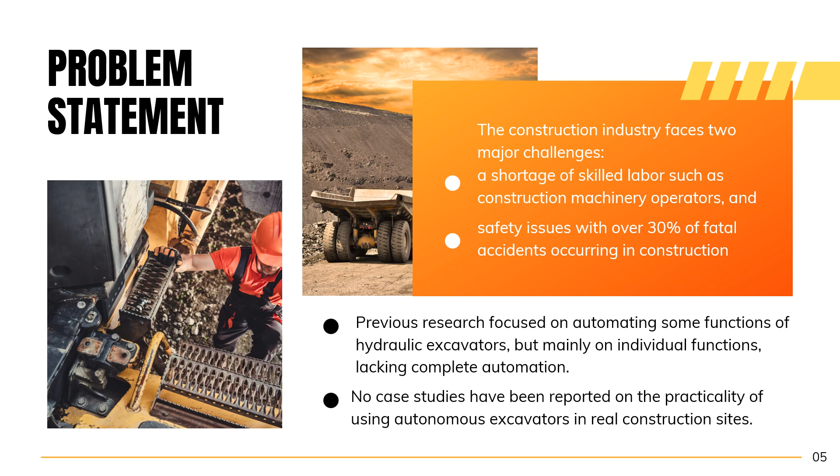In 2002, researchers worked on making a hydraulic excavator operate automatically using sensors and complex controls to guide its movements and route. In the late 2000s, studies were conducted on the forces affecting excavator buckets and using LiDAR and cameras to recognize the ground. This was done to understand operators' techniques in moving buckets, aiming to develop autonomous excavating machines.

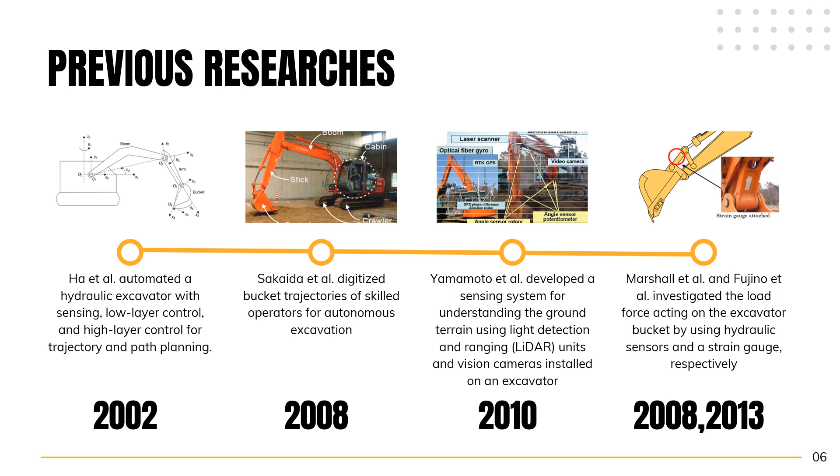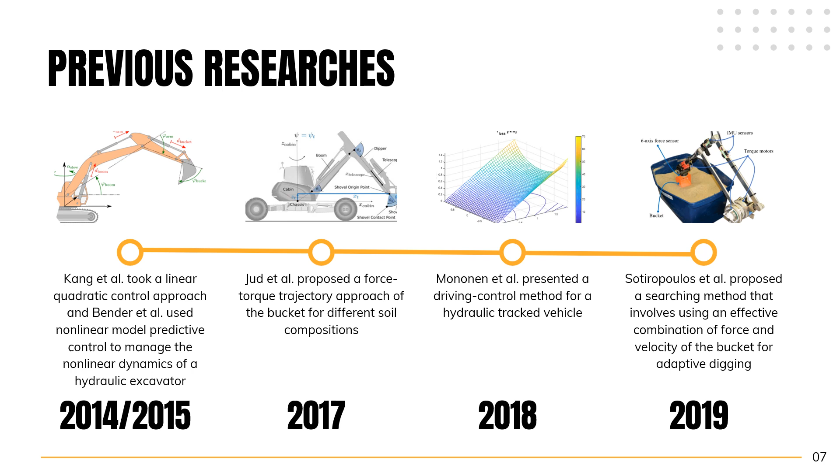Moving into the 2010s, research has focused on automated functions like trajectory and path planning. More recent work in the late 2010s proposed techniques like adaptive digging using force and velocity. Other research explored various driving control techniques and analyzed force-torque trajectories across diverse soil types. Numerous research efforts have adopted control theory techniques like linear quadratic control to proficiently manage complex nonlinear dynamic systems. This overview of past research laid the groundwork, but full automation and practical testing was still lacking.

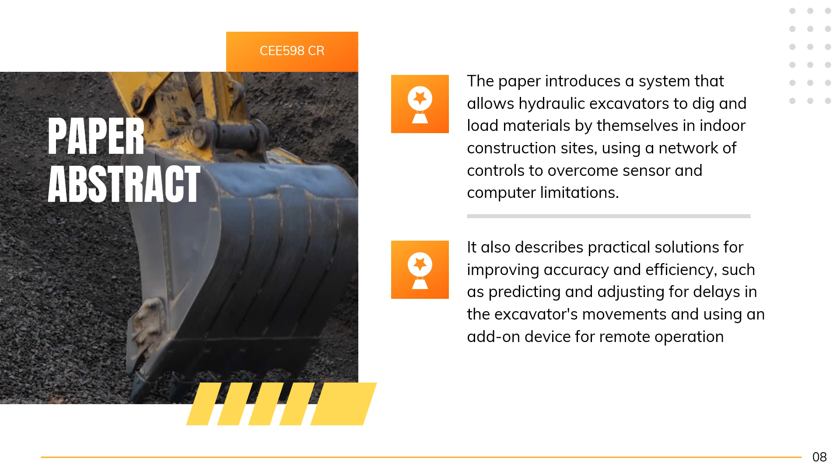This paper introduces an autonomous system developed to fully automate excavation and loading tasks performed by hydraulic excavators in indoor construction sites. The system uses a network of controls and sensors to guide the excavator's movements and overcome limitations in computer vision and hydraulics. Practical solutions are proposed, like delay compensation and an external actuator, showing how challenges of autonomous heavy equipment can be addressed. The researchers tested this system at an actual shield tunneling site to validate that full automation of excavation and loading is practically feasible with the right controls architecture.

The authors aimed to develop a self-managing system that could automatically handle all excavation and loading tasks on a construction site. This addresses the issue of incomplete automation in previous research. Another objective was to test the practical implementation of the system at an actual shield tunneling construction site. This objective is essential as it moves beyond lab simulations to real-world validation. Real-world testing will show if the system can automatically do tasks on a job site as planned.

The paper was chosen for its focus on creating an automated system for excavation and loading in construction using robotics. It highlights the significance of robots in construction, mentioning the development of autonomous machines equipped with sensors, controls, and machine learning capabilities. The authors emphasize the importance of testing robots on real construction sites to ensure their accuracy and efficiency, making their research significant for practical construction work with robots.

This slide provides an overview of the various methods used in the research. Slope sensors and linear encoders were installed on the excavator to measure its posture and rotations continuously. A depth camera installed within the arm captured the volumes of soil in the bucket. 2D and 3D LiDAR were used for tasks like localization, terrain mapping, and truck detection.

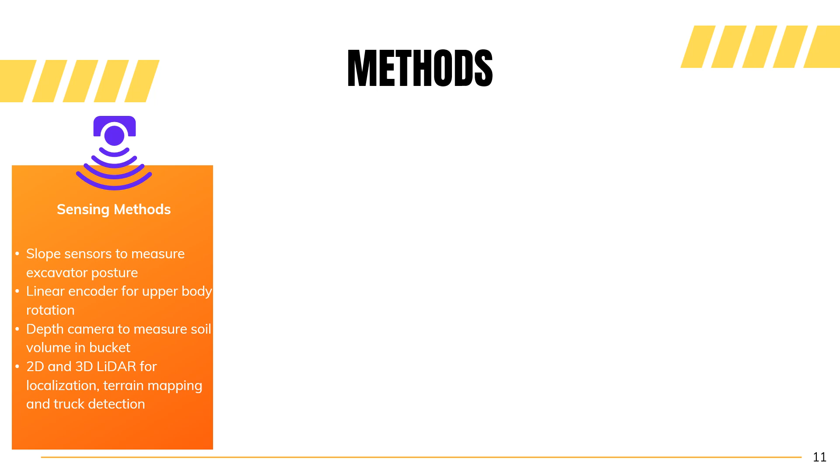Inverse kinematics calculates the required joint angles for desired positions. Proportional integral control manages angle and position effectively, while also compensating for hydraulic delays. State predictive control prevented overshooting. Initiating movement involves parabolic path planning, guided position control, and travel enabled by friction compensation.

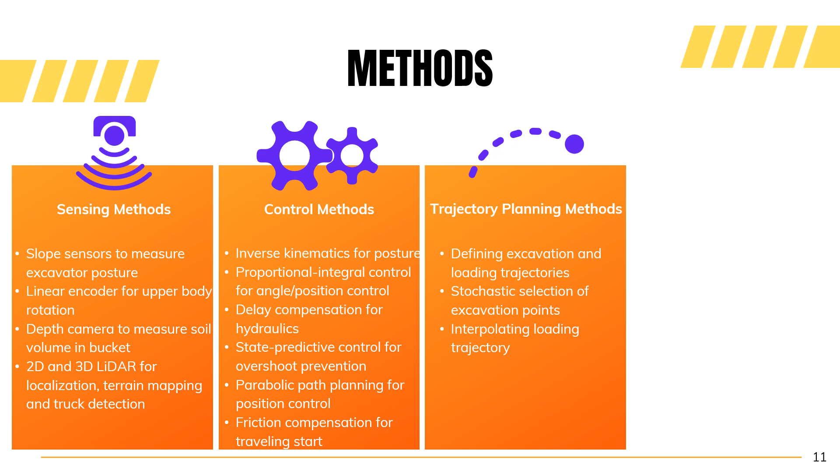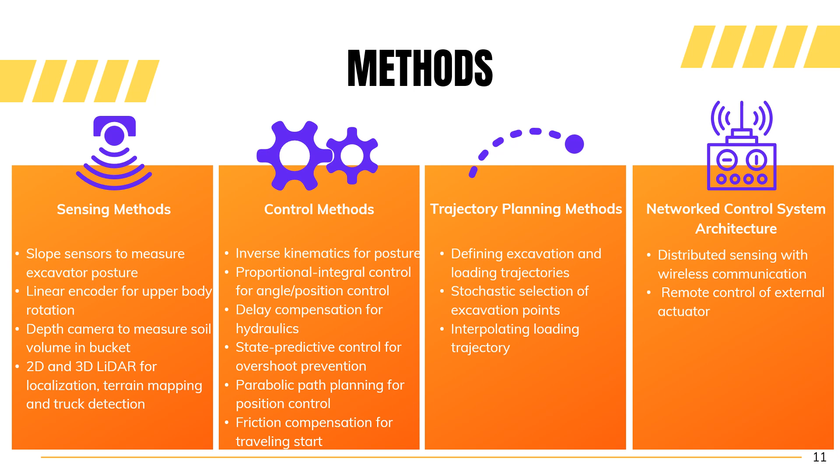Excavation and loading trajectories were defined through stochastic point selection and trajectory interpolation. A network of sensors gathers information wirelessly. An externally controlled actuator permitted operation from a remote location. This wide array of sensing, control, planning, and network system methods was vital to achieving the complete automation objectives.

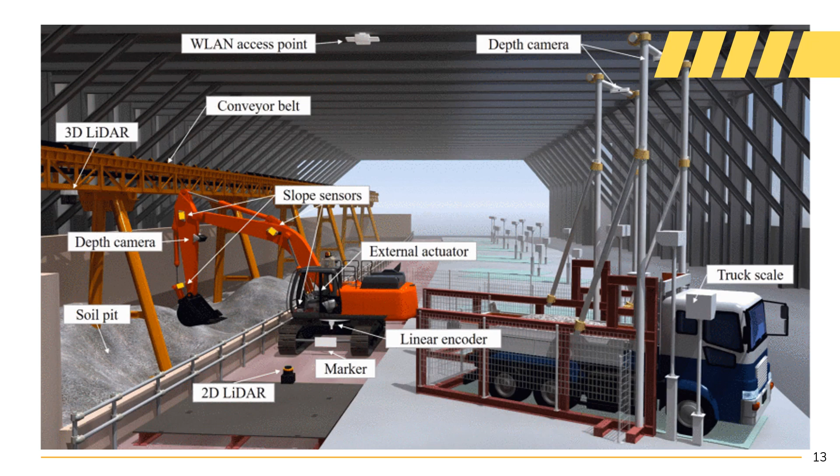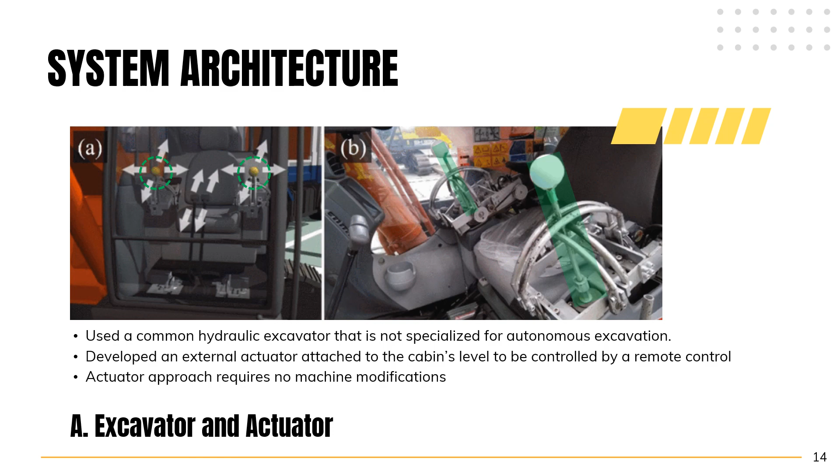This slide provides more details on the excavator and external actuator used in the system architecture. A standard hydraulic excavator already on site was used without any modifications, demonstrating the system's practical application. An actuator was installed in the cabin for remote control to safely operate the excavator without any changes to the machine.

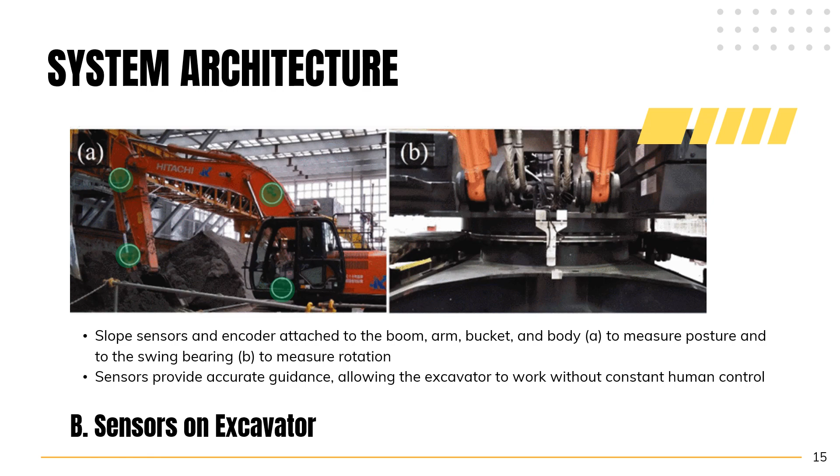Sensors and encoders were placed on important parts of the excavator, like the boom, arm, bucket, and body, to track their position during automated tasks. This distributed sensing approach allows for highly accurate guidance and control without constant human oversight. The external actuator and sensor installation methods were, therefore, practical solutions for autonomous automation.

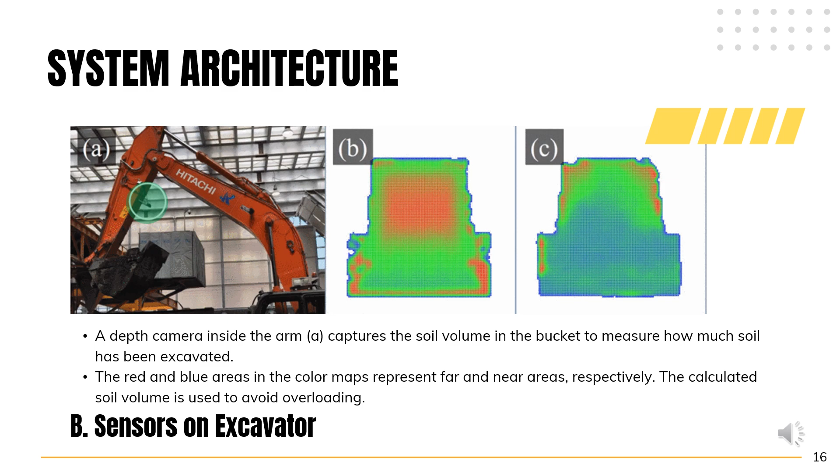A depth camera was installed within the arm to precisely measure soil volumes in the bucket, which is essential for tasks such as preventing overloading during the loading process. The camera captures RGB and depth images to differentiate between soil and empty space. The red and blue areas in the color maps represent far and near areas, respectively. The calculated soil volume is used to avoid overloading.

A 2D LiDAR was installed to measure the excavator's position by detecting the center and slope of a white marker placed between its crawlers. This enabled the heavy machinery to be positioned and moved accurately, making the excavation process more precise and efficient.

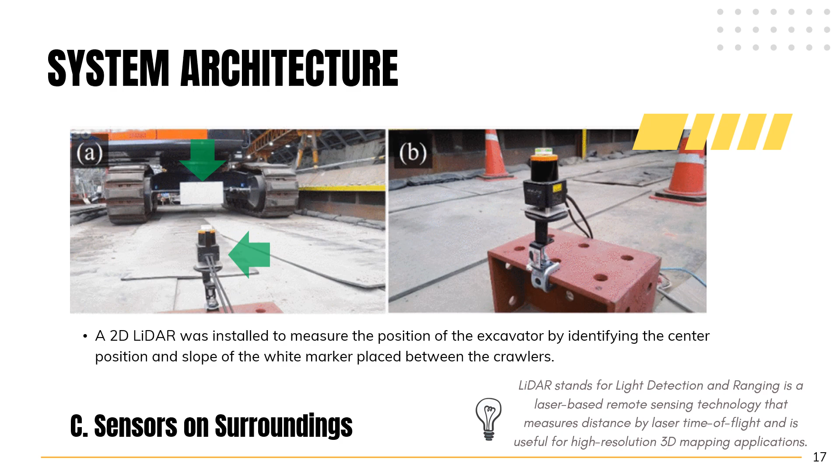A 3D LiDAR unit is placed beneath the conveyor belt to capture a full view of the soil terrain in the soil pit. This created a map of the area to help plan where to excavate. The detailed terrain map helps adjust the excavation equipment accurately, reducing harm to its surroundings.

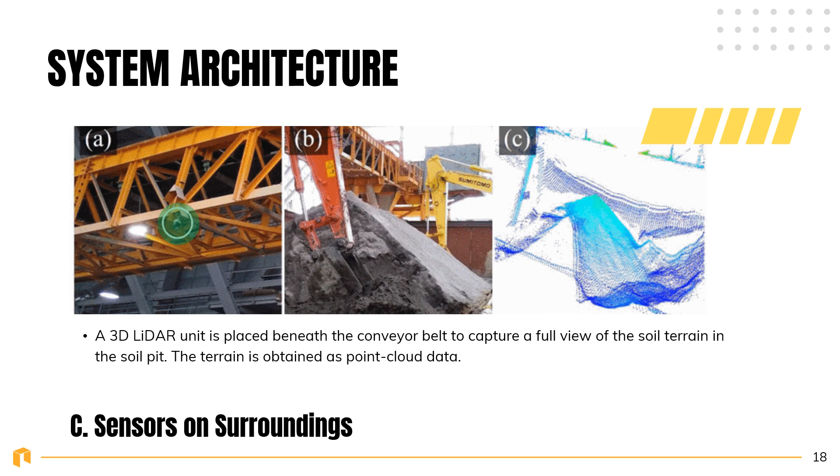A depth camera above the truck scale accurately measured truck parameters like position, size, and height through object detection. The sensors enabled the excavator to enhance its visual capabilities, allowing it to autonomously interact with soil piles and operate alongside dump trucks. The camera captures images in RGB and records depth information. In these images, red areas represent far areas and blue areas represent near areas.

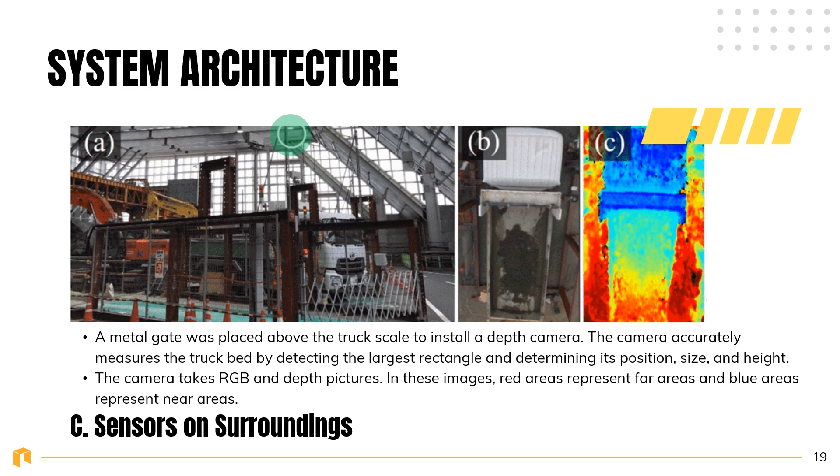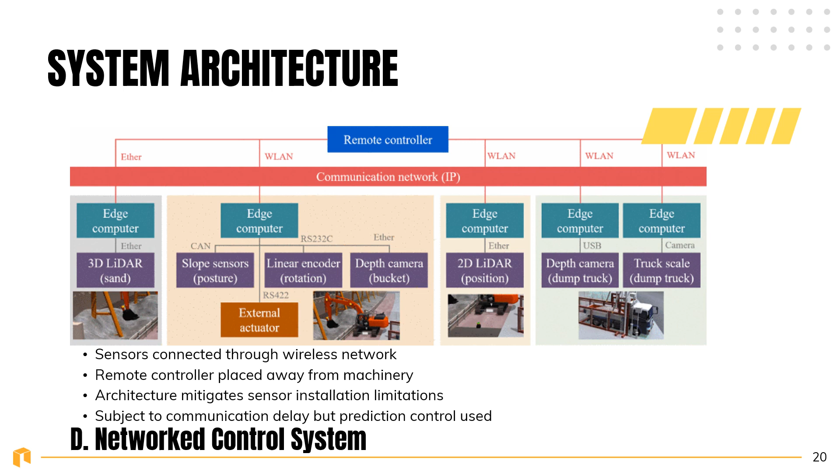The network design integrated information from onboard excavator sensors with off-board perception of the environment and tasks. This facilitated a coordinated and hierarchical oversight over various interactive elements. Though subject to some limitations, the architecture demonstrated a practical solution for autonomous heavy machinery in real-world construction sites. By leveraging wireless technologies, it advanced previous research through a validated field application of distributed robotic and automated control.

Posture is uniquely defined by bucket edge coordinates X, Y, φ. These are determined by boom, arm, and bucket angles θ1, θ2, θ3. Upper body rotation, represented by the angle θ4, is also a contributing factor. Inverse kinematics transforms X, Y, φ to joint angles θi. Proportional-integral control progressively adjusts each angle θi towards its target.

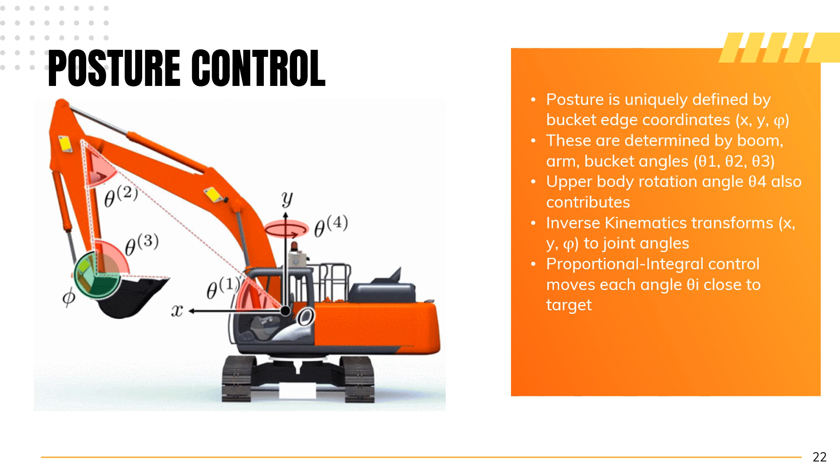Inverse kinematics is the process of calculating the angles of each joint, like the boom and arm, required to place the end effector, such as the excavator bucket, at a specific position and orientation. This is the inverse of forward kinematics, which determines the end effector's pose given the joint angles. By applying inverse kinematics, the system can autonomously maneuver the excavator one joint at a time to precisely achieve target bucket positions for tasks like digging.

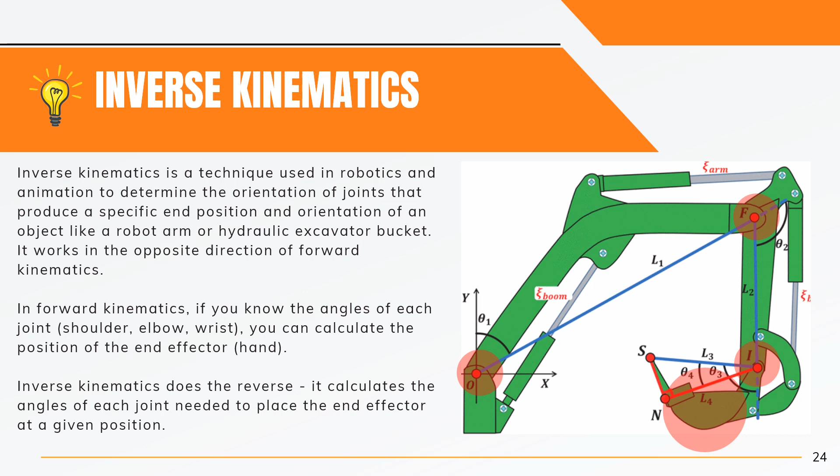This allows for discrete step-by-step control of the hydraulic excavator's complex and non-linear movements. Inverse kinematics is a fundamental robotic and animation method that was leveraged here to enable precise human-level control of excavator postures during autonomous operations.

The excavator's position on the worksite is defined using coordinate points, S and T. The target positions for tasks like loading trucks are given using this coordinate system. A parabolic traveling path is planned between the excavator's current position and the target coordinates. This path allows smooth movement to any point on the worksite. The excavator's center velocity along this path is controlled proportionally to the distance remaining to the target. The speed and path curvature are used to determine the needed speeds of the left and right crawler tracks.

A major challenge is overcoming the strong friction force between the crawlers and the ground, especially when starting to move. If the inputs exceed the static friction limit abruptly, it can cause errors in reaching the target position. To address this, a friction compensation control was developed. When initiating travel, it briefly elevates the lever inputs that deliver motion commands beyond the standard operating parameters. This allows static friction to be overcome smoothly and minimizes any position errors.

Position control is mainly used for loading trucks at different locations and for correcting errors during excavating work. This ensures the excavator can reliably reach any position required to complete its automated work cycle.

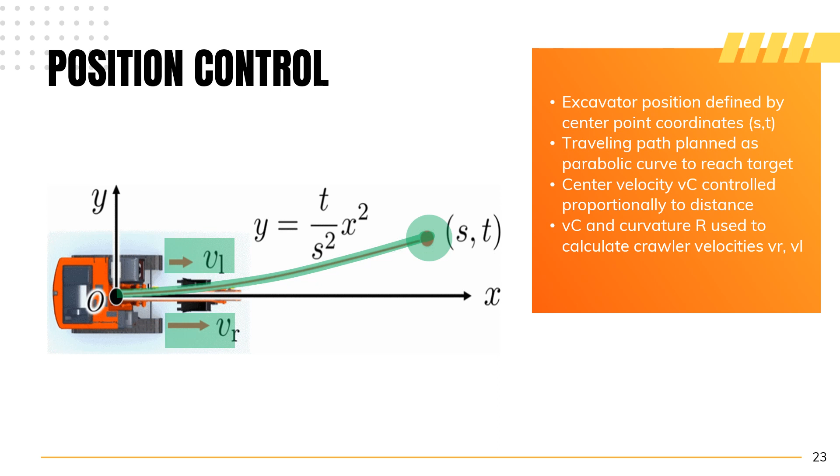The excavation trajectory is defined by 5 factors: bucket edge angle to soil, psi; initial insertion depth, D initial; maximum depth, D max; dragging length, L; and dragging angle, lambda. Psi is set vertical to the soil slope at insertion. Lambda is the average slope in the dragging interval. D initial, D max, and L are calibrated through experiments.

The trajectory is converted to a series of target bucket positions: X1, Y1, Phi1, X2, Y2, Phi2, etc. The excavator smoothly moves its posture between targets, ensures an appropriate amount of soil is excavated, and avoids getting stuck while digging efficiently. After excavating, the bucket is shaken to remove extra soil.

This trajectory definition enables the automation of excavation operations to replicate the expertise of experienced operators. Calibrating parameters and the seamless posture control between targets enable efficient excavation while ensuring stability.

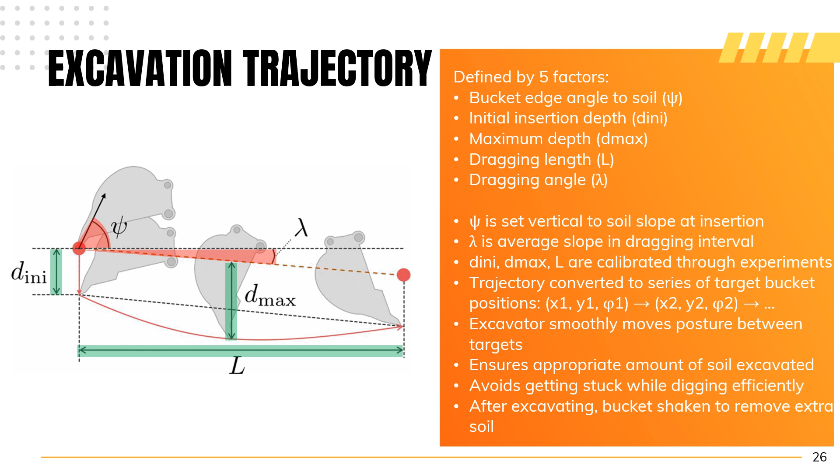The loading trajectory is defined by the start and end positions of the bucket edge: XS, YS, Phi S, XE, YE, Phi E. Positions are interpolated to gradually move the loading zone. This prevents overflow as the weight in the truck increases. Feedback from the truck scale reads the weight.

When the remaining weight is below the bucket estimate, the bucket is opened little by little, with a wiggle to adjust soil placement. It stops if the target weight, 97% capacity, is exceeded. This ensures efficient yet safe loading.

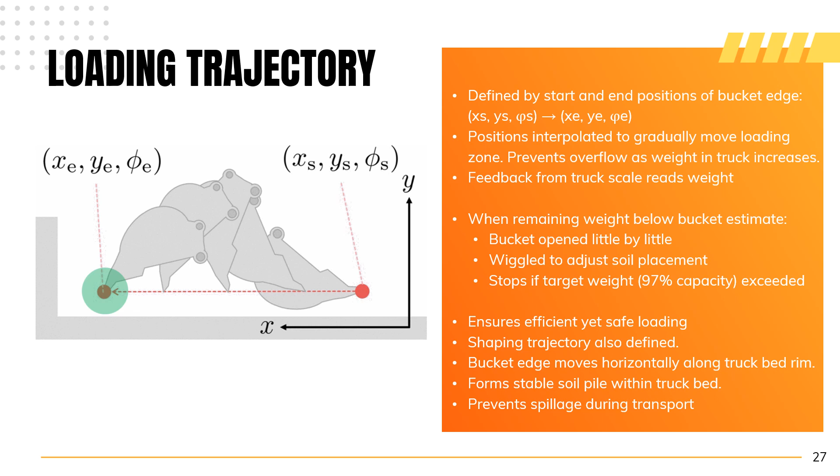A shaping trajectory is also defined. The bucket edge moves horizontally along the truck bed rim, forming a stable soil pile within the truck bed. This prevents spillage during transport. This method enables automatic loading that precisely tracks weight and safely shapes the soil stack based on truck scale feedback.

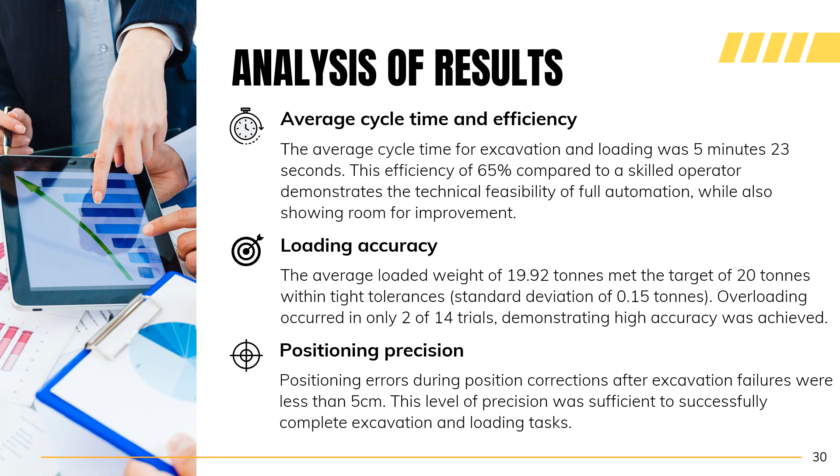This research had some important limitations. Testing was conducted only indoors under controlled conditions, without evaluating performance in varied outdoor environments. Only the tasks of excavation and loading were showcased, excluding other construction activities such as bulldozing. Coordinating multiple autonomous machines working together simultaneously was also beyond the scope of this study.

While feasibility was shown, the autonomous system's 65% efficiency leaves room for improvement compared to human operators. Expanding outdoor testing and improving coordination between multiple machines are key steps to advance automation in real-world construction.

To build upon this work, the presentation outlines several proposals for future studies. Conducting long-term outdoor testing in diverse conditions would evaluate the system's robustness over time. Adding more sensors may help in automatically measuring piles of soil. Creating a management system can make several excavators work safely together, making them more efficient than just one operator.

Optimizing control systems could potentially boost the speed of movements. Using autonomous technology in different excavator models can make construction machinery more versatile and useful. Continuing this research agenda can help address the challenges raised and bring fuller automation to real-world heavy machinery applications.